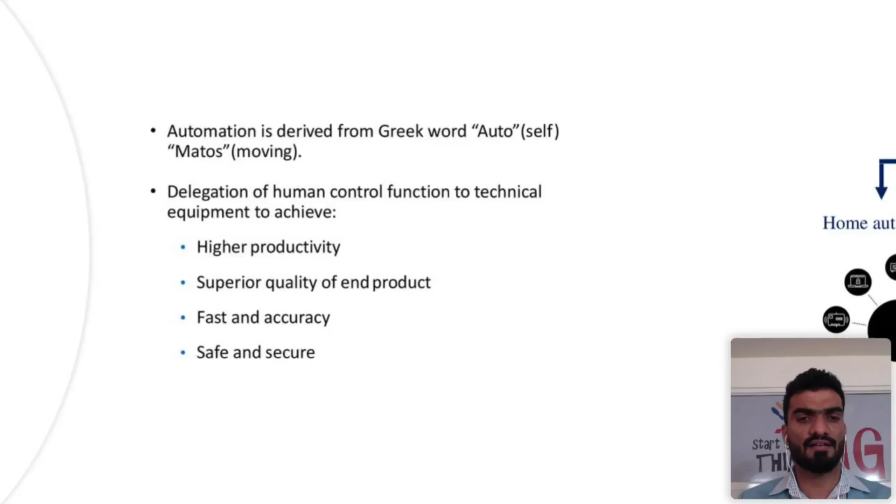I don't want to take much time because I have to follow my timeline. Automation — the basic idea is 'auto' and 'matos': by itself it has to move. That's basic automation, seen everywhere. But today we are going to talk about industrial automation and types of automation.

First, types of automation: there is home automation, building automation, and industrial automation. For home automation, you might know it well — it's like CCTV surveillance, access control such as door access and gate access, and lighting control. So CCTV, networking, lighting control, and access control are the main parameters involved in home automation.

Now coming to building automation — what's involved there? It includes lighting control, CCTV surveillance, and also HVAC: heating, ventilation, and air conditioning systems. So HVAC covers heating, ventilation, and air controlling systems, like air conditioning, and together this maintains the entire building.

Audio clear? Yeah, yes. Just a moment — I want to tell one thing: when I'm going by my flow, just allow me to continue. No problem, we are there, and we'll answer all your technical queries and clarify all your doubts. We'll stop somewhere and have a discussion. Meanwhile my team is also in the webinar room, and they'll answer questions as they come. So I may not stop to answer right now — just allow me to move on.

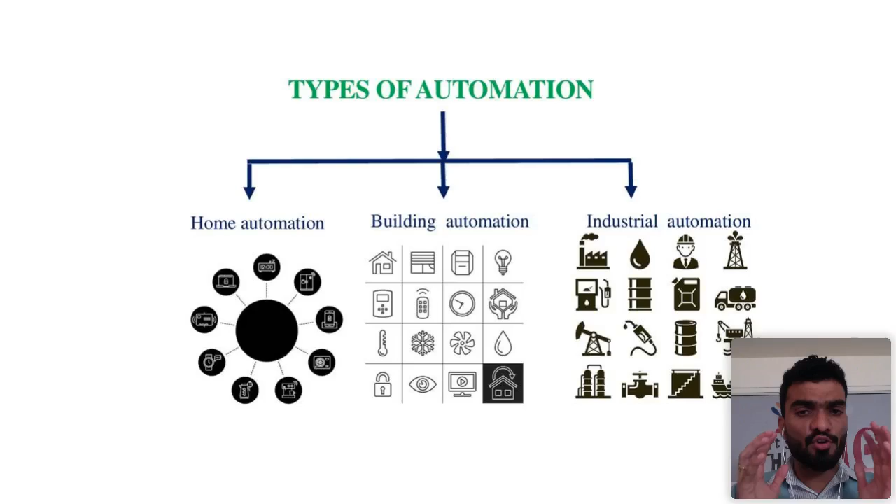See, basically two things: machine automation and process automation. Any one will be there. Now we are going to see, if you go by your industrial automation, if you do your machine automation and process automation, what are the main advantages?

So these are the main advantages. Your production will get increased, and your productivity will get increased. Your product quality, production, ease of control, and safety level, all these things are going to get increased, and your manpower is going to reduce. Your energy consumption will get reduced, your project timeline also will get reduced when you make an automation, and your raw material consumption to make a final product will also get reduced. So these are the main benefits to the industry.

Now, most of you are from academics background. I just want to tell here, the industry is much benefited when they go for industrial automation. When they make their machines automation, when they make their process automation, they are going to get these benefits. So you have to know, by means of these benefits, people are forced to, people are required to convert into automation. All these industries, any kind of manufacturing unit, they have to convert into this automation. So this is a need, and this is where you people also can understand the potential. The potential is huge.

Audio, please. Hope my audio is clear, if I'm not wrong. Stuck up, Rajshekhar Gaud is telling it is stuck up, and Guru Prakash saying it is audio, please. Can anyone clarify me? My AV is clear. AVS, audio, video, and screen. So whether my AVS is clear, please confirm. It is stuck. Is my AVS clear? Hello? Yes, clear. Thank you. Okay, done. Okay, so whoever is facing challenges, please try to reconnect. If really there is a challenge, then I'll also check my connection.

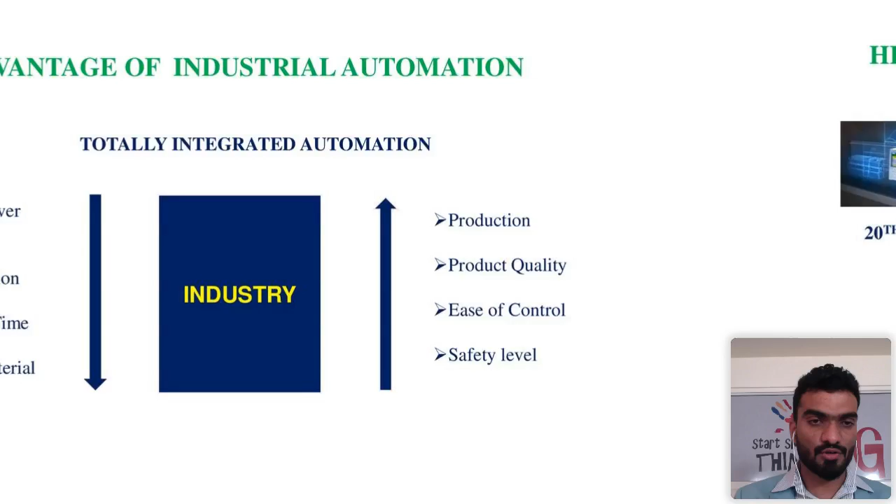Yeah, thank you, so now going to next slide. So what is the history of industrial automation, when did it start? In the 18th century, we know very well, it was completely manual control. There was no automation, no logic control or relay logic controls kind of thing. Then afterwards, in the 19th century, they used to control the things, the process, or the movements by using relay logics or some hardware. By means of hardware, by making some relay logics, they were able to maintain few operations into manual interruptions, meaning manpower. They used to avoid manpower, and they used to do this.

And then in the 20th century, all these activities were taken up by logical controllers. It might be a microcontroller, it might be a programmable logic controller, it is different. So they have introduced these logical controllers, and they are able to make the process into automation.

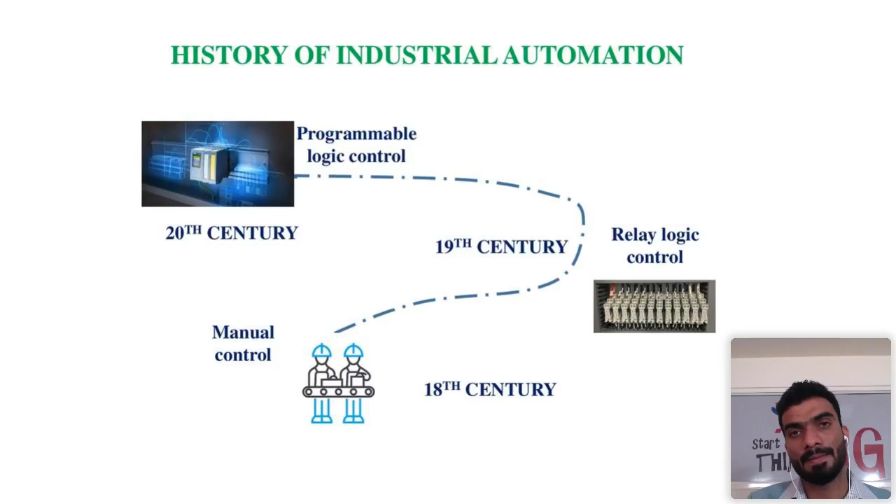Now, what are the automation products? We call it PLC. We are going to discuss all these products in the next slides, don't worry, I'll just move on fast here. PLC, we call it programmable logic controller. HMI, human machine interface, and SCADA, supervisory control and data acquisition. VFD, DCS, Servo - these are the products or topics. People from academics, you can take it as topics. People from industry, we know it very well, it is products. So we wanted to cover both.

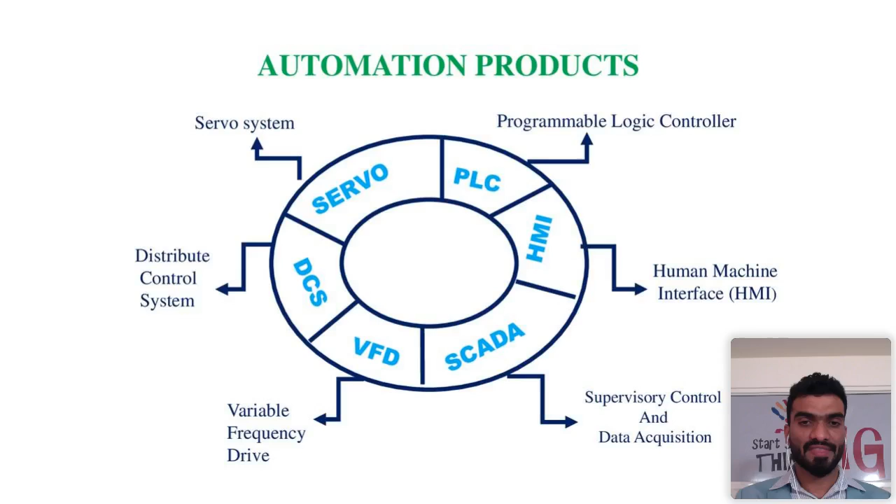Yeah, so now we are going to discuss what is PLC. So PLC is like programmable logic controller, and it is a digital operating electronic system designed for use in industrial environment. See, it's like, we have a practical piece, practical kit over here. I would like to show, but before that, I would like to tell programmable logic controller is like a hardware device which is shown in the image. We call it PLC.

The PLC is going to have inputs and it is going to have output terminals, whereby you can connect all the field instruments as inputs and all the field instruments as outputs. And then we can connect this particular PLC hardware to your laptop, because you need to do the programming to that PLC.

The PLC, based on the programming, uses programmable logic controller software. With the help of software, we develop a program, the logic, the sequence, how you want to run your machine by getting input and giving output. So this entire logic we build in a programming software and send it to the PLC.

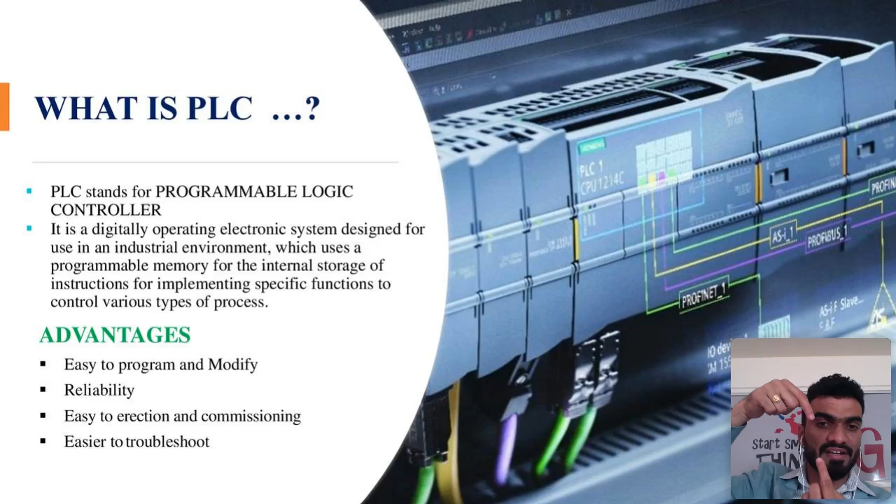Based on the input command received, whatever program we have written might say that whenever the command is received, the motor should turn on. Then my PLC performs that particular program and gives output, so my output will start and rotate the motor. So this is input, this is output.

Between we have the PLC. Now I'll show you one practical kit. See, this is a PLC, programmable logic controller. So whatever we have connected here, these are inputs, and the outputs we have connected at the bottom, we call outputs. So this is input and this is output.

If you see this PLC, it has all the status indications: power, when we give power it gives a power indication, run, error, communication 1, communication 2, communication 3. This is a communication port whereby we can connect a cable to your laptop, write the program on the laptop, and send it to this PLC, which receives the program based on the input.

Suppose, for example, we have shown some outputs and some input connections here. Are you able to see? This is a sensor. When I sense it somewhere, my PLC is going to give an output saying that particular command has to be on. So if I remove this, then it is off.

We have written a small program to show you this live. See, if I touch this here, then you will see. So I'm just touching the metal part, and this sensor is sensing, and my PLC is giving output. Are you able to see this?

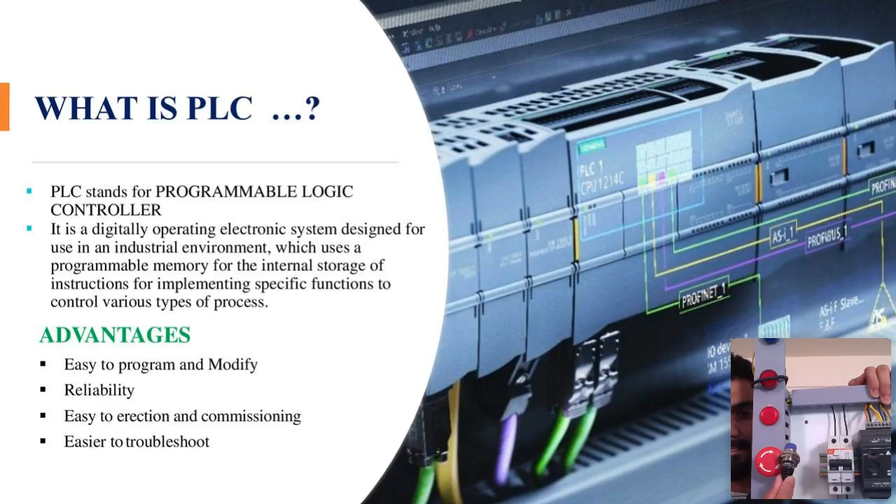Which PLC is this? For the demo purpose, we have shown Delta and Siemens PLCs here, just for the idea's sake. What my intention is, you need to connect your inputs and your outputs to the PLC. Based on the logic required by the user, we develop the program, and that program can be performed by the PLC without any manual intervention. So this is all basics about PLC.

There are programmable logic controller software, like ladder logic. We'll discuss which PLC application software to use in the next slide. We have ladder logic, a basic language used to develop the program. We suggest ladder logic. Now, what are the main advantages of PLC?

It is easy to program and modify. It is a more reliable product. Erection and commissioning become easier, and it is easy to troubleshoot because it's an intelligent device. When something goes wrong, it will show an error indication, and it will also give an error message to the HMI or SCADA. Then we understand what the problem is in the PLC, and you can rewrite the program multiple times.

It is not like a microcontroller, where we have limitations. If you write the program, you may not be able to rewrite it. But in the case of this PLC, you can write the program, modify it, change the inputs, change the outputs, numbering, coding, everything. So you can do this multiple times.

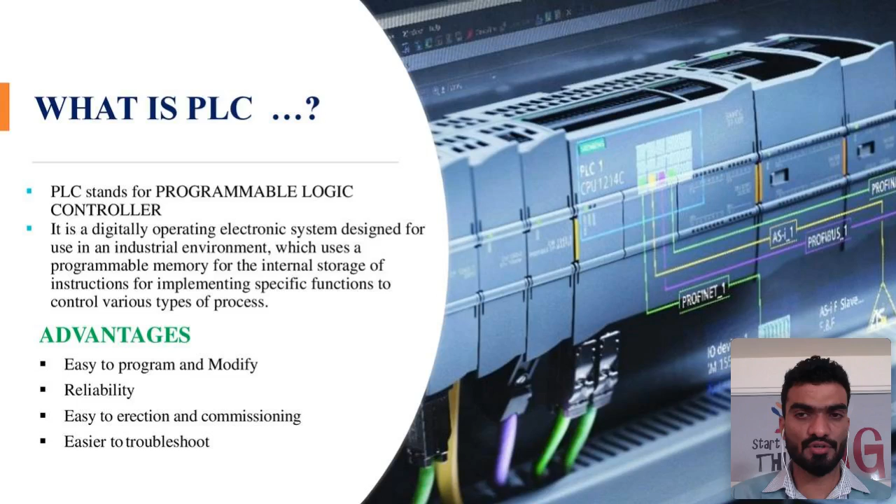Now, what are the applications of PLC? I can tell you PLC is used everywhere automation is required, because this is a logic controller whereby all your field instruments, like sensors, push buttons, all switching devices, all inputs and outputs, need to be connected to the PLC itself. There should be a master controller which can receive inputs and send outputs.

With the help of this master controller only, we'll be able to make any machine or any high-end automation. So PLC is applicable everywhere, I can say.

And the major applications, if you want, you can use cement plant, most of the applications like in your crusher, stacker, reclaimer, bagging, and your kiln section, and your silos, everywhere. Food and beverage, all the sections start from cleaning, then capping, filling, then packing, then dispatch, storage, everywhere, conveyors, all these areas.

Now, what is HMI? HMI is like human machine interface. So it is like a hardware. I'll just show you the hardware first. Yeah, this is the HMI.

So this particular device, we call it as HMI. HMI basic definition is human machine interface. So it is like an interface device between machine and man. You have operator, you have machine most of the times in an industry. So your HMI works as a media between your operator and machine, in between.

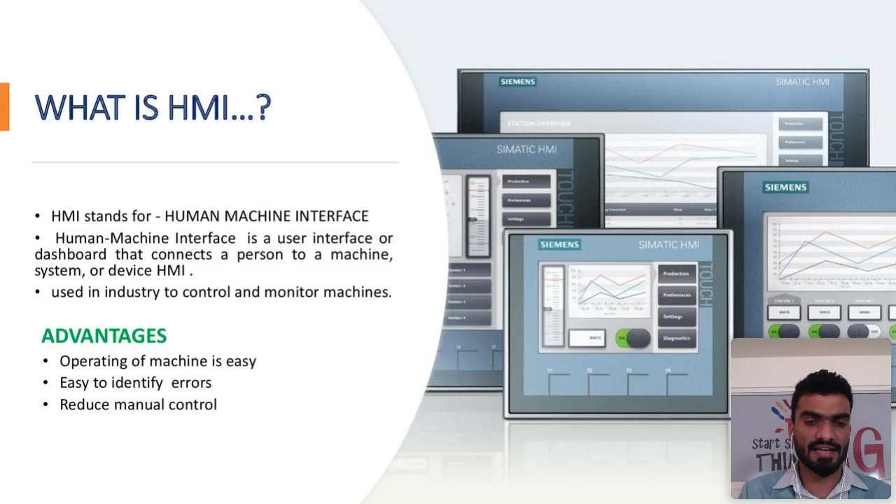Applications of HMI include packing machines. Most of the time HMIs are used in packing machines because it is very good for recipe management. In a packaging machine, you need to enter multiple parameters, so in that case the HMI plays a major role.

It can store all those parameters, and whenever you recall it, it will select them. Suppose you need a 100 gram pouch manufactured, then in the same line you may need 200 grams, 500 grams, or 1000 grams. Every time you set all these parameters manually, it takes more time. With HMI, once you make a recipe, you can just call that recipe and start the work and move on.

We'll come to the difference between HMI and SCADA, Mr. Jitendra, because in the next slide we are going to discuss SCADA and then we'll compare both.

One thing you have to understand about HMI is that it is used for one PLC — one machine is controlled by one HMI. Just remember this point; I'll tell you the differences between HMI and SCADA in the next slide. We can also use HMI in process industries, but most of the time one HMI is used for one machine, meaning one PLC. So HMI is like a machine-purpose device.

These are some bottling lines and packaging machines. All of these are examples of HMI applications.

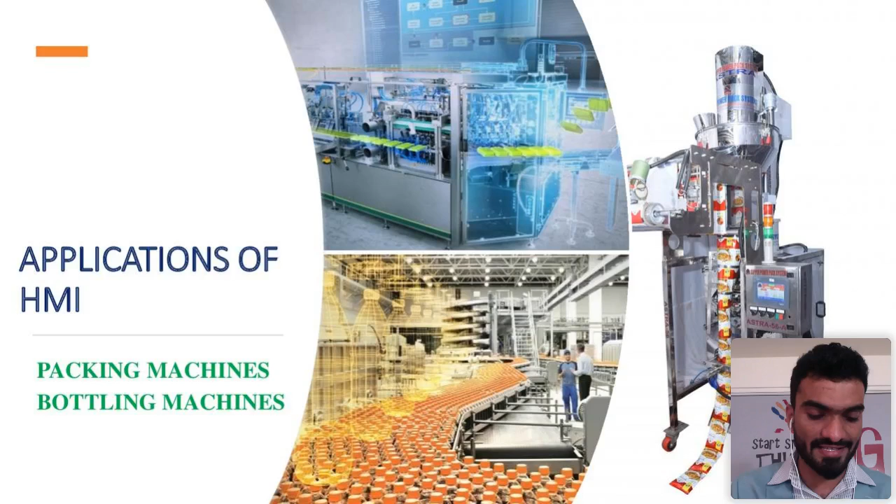Now we'll see what SCADA is. By seeing this picture, you can understand that SCADA is like a software first of all — HMI is a hardware, SCADA is a software. This is one particular difference. SCADA stands for Supervisory Control and Data Acquisition; the abbreviation itself describes it.

The controlling becomes a supervisory function, and it can acquire data. It can acquire entire plant data, store it, and give you a recall whenever you want the data. From the stored data, you can recall and check later. So if you want, say, a 30-day-back production report of what's going on in my plant, you can recall that data, get the graph, take a printout, and check how many times the power was on, what the production level was, and when a particular motor or machine got turned on. All these matters can be checked from previous data.

So SCADA is like a software — you get a software that you load into your PC or laptop, and you have to make a program. Of course in HMI it's the same; we get HMI software where icons of motors, compressors, and other industry items are already configured. You drag that option and place it, then make the addressing — we call it a tag. You give the tag address, and then the addressing between your PLC inputs and outputs.

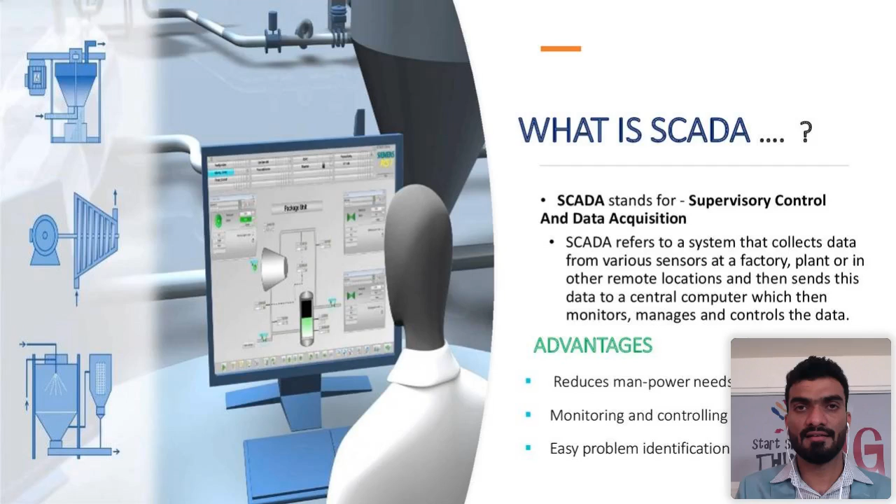You can create securities, meaning you can create more number of operators. You can give some screen access to operators, some more level of access to supervisors, and high level access to managers. You can create these logins and passwords - we call this user creation.

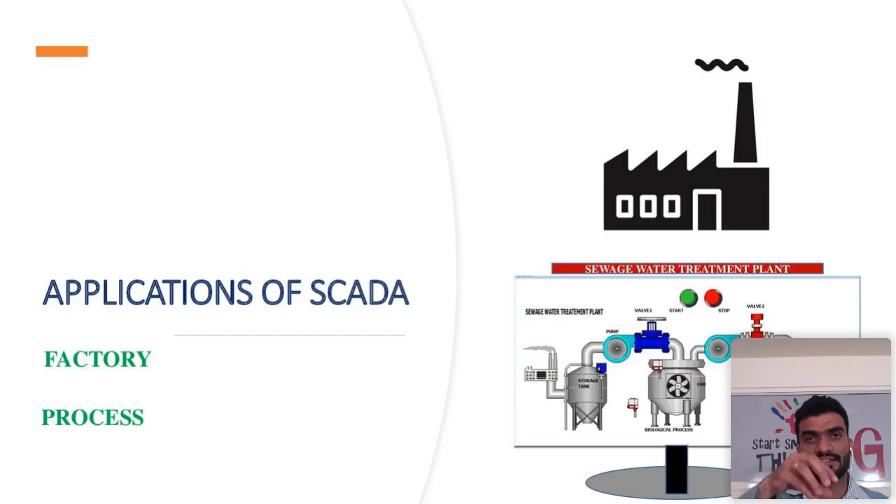What are the applications of SCADA? SCADA is most of the time used in process industries. When I say process industries, it is one interlocked with another. For example, power plant is a process industry, beverage is a process industry, pharma is a process industry, water and wastewater is a process industry. All these industries are interlocked with one another.

So this entire process is monitored through SCADA - it's like factory and process, and also pharma industry. So these are the applications of SCADA. SCADA will get all the field inputs and outputs from the PLC only. Kindly note this point.

Now, drives - what are drives? Drives we call VFD, variable frequency drive. It means to control our motor. Generally we have motors, right? We have induction motors, we have AC motors, and we have DC motors.

SCADA is for vast applications, right? So now we are talking about drives. Drives are of two types: for AC current we have AC drives, for DC current we have DC drives. AC drives are used to control our induction motors. So what is the benefit of drives? I'll show you the drive first and then I'll explain.

So this is a VFD. We connect L1, L2, L3 - this is line 1, 2, 3. These 3 terminals are for the input. We will connect the 3-phase input over here, and my drive will get power, and then I'll connect the output terminals of the motor here - U, V, W, the output 3 terminals - I'll connect to the motor.

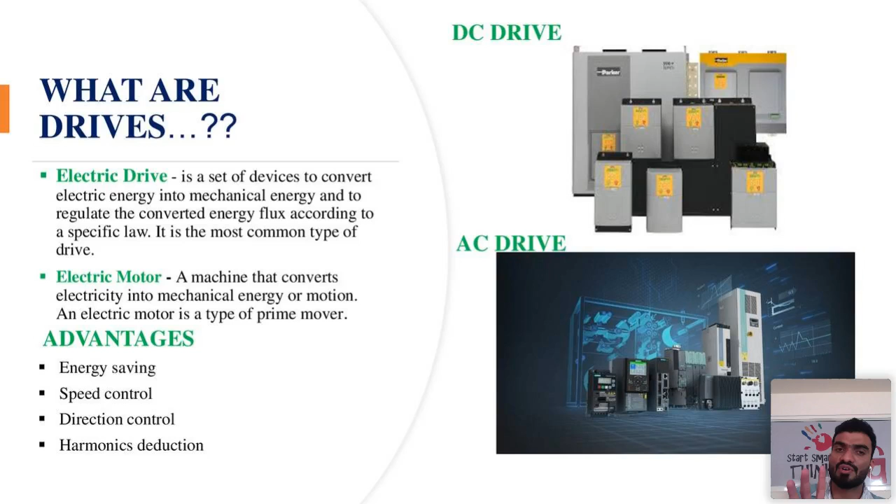These are the points. So what are the applications of VFD? For AC motors, we have AC drives. DC motors also have DC drives. What are the applications? We have shown some basic applications because you need to understand.

Elevators, all your elevators will be running through drives. That's the reason you are getting proper speed levels and smooth start, smooth stop, increase, decrease, all these kinds of control. All these elevator drives and elevator motors are connected to the drive. That's the reason your controlling has become more easy nowadays.

Then conveyors, most conveyors wherever speed controlling is required, increase, decrease kind of thing, these are the places we suggest to use drives. People are using drives in conveyors in most areas in industries.

Now coming to the third image, we have shown a building here. In this building, whatever red color icons we have shown there, those are motors. They are used to control the air, the room temperature into that building. They have used air, and for pumping water and other wastewater treatment, they have used motors. So it is basically air and water control.

Whatever white color icons we have shown there, all those are drives. So for each motor, we have connected a drive to control the speed, to maintain the temperature, and to start and stop whenever required. So these are a few applications for your idea.

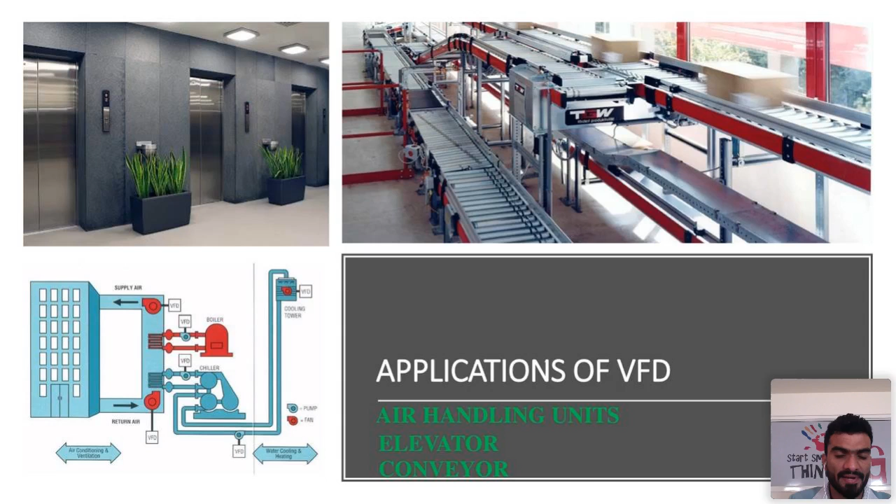So what is a servo system? A servo system is like a combination of motor and drive. Now I'll show you, we have some servo here. This is a servo motor. Sorry, this is a servo drive.

As I have shown in that picture also, it is a motor and drive combination. This is a servo motor we have. This is a motor and drive, and we have two cables. These two cables are connected to the drive of the servo. So we connect power. First we give power.

We give power here, these particular terminals give power as an input. Then my VFD will get power, and these are the outputs which we give to the motor. Then my servo motor will get power, and one is a power cable, one is an encoder cable which is connected to the motor, and one more is a communication cable which is connected to your laptop to make the program. So this is the combination of motor and drive.

So a servo motor is like a permanent magnet motor. We call it a synchronous motor. This is an AC motor, synchronous motor. We also call it a permanent magnet motor.

So here the advantage between an induction motor and this servo motor is that this particular shaft is a single shaft which is connected between the permanent magnets. So whenever it rotates in some particular direction, this rotation is more accurate, and we have an encoder cable here. Due to this encoder cable, this encoder is directly connected to the shaft.

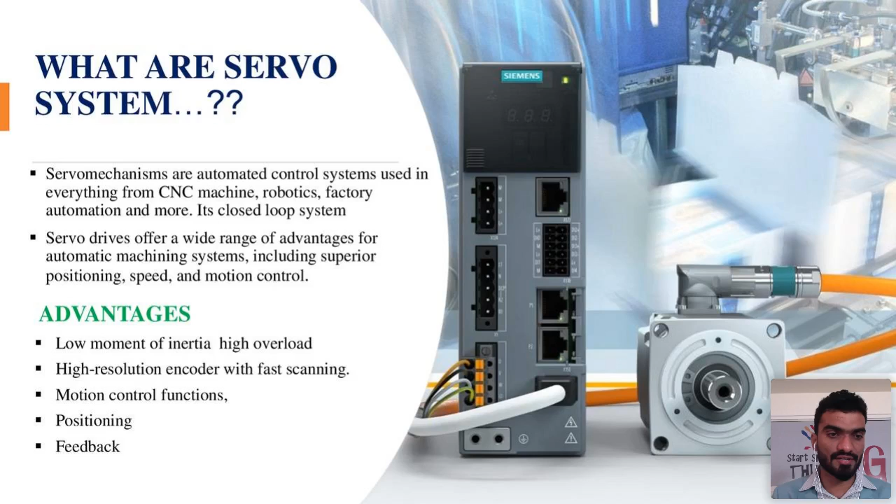As shown here, low moment of inertia at high overloads, and high resolution encoder. It has two types of encoders: incremental encoder and absolute encoder. Absolute encoder means it will give high accuracy, and whenever the power goes off and comes back, it will start from the same position. It retains its memory and starts from the same point, and it can have PLC analog control very easily if we have these absolute encoders. Then motion control functions: positioning and feedback.

Now I'll tell you the applications, then you will understand more. The main applications of servo systems are very precise cutting lines and processing systems, also CNC machines. All your milling, all your lathe works, everything is done by servo, because servo is more accurate. With high speed it can give very good output, and the controlling of everything is very precise. So servo is used in CNC machines, and in high-end cutting machines to have very good accuracy.

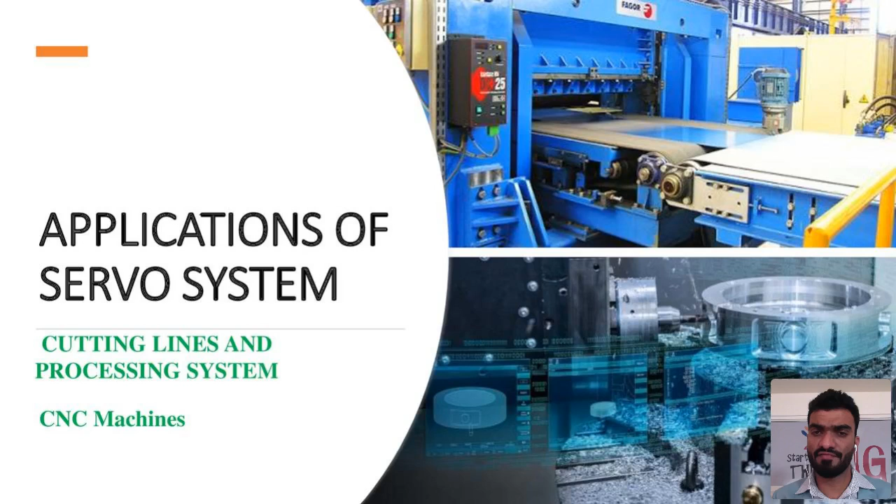So now what is DCS? DCS is a distributed control system. It is like a high-end system, higher than PLC. PLC can only control a few inputs and a few outputs. It has some limitations, but DCS does not have any limitation. It can control thousands of IOs, and it can cover an entire plant—any big process plant, any big power plant—everything, all inputs and outputs and all systems and subsystems can be controlled by DCS. It's a distributed control system.

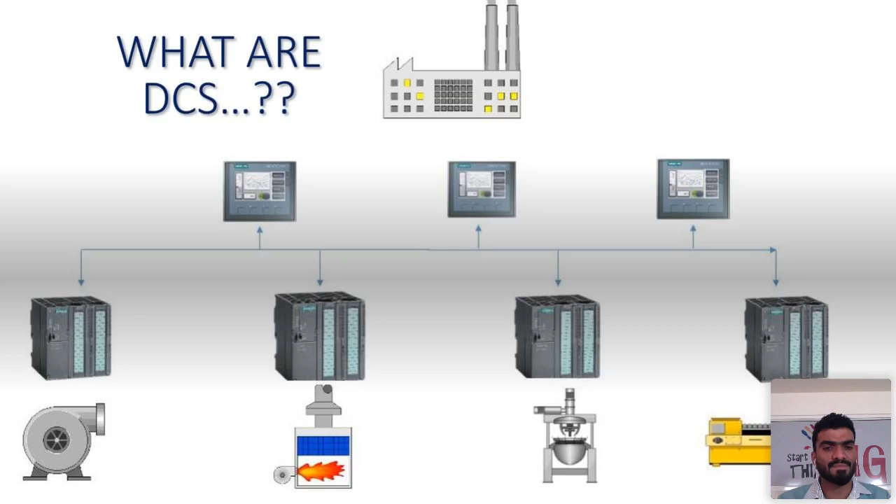So what are the applications of DCS? In pharma plants, for high-end applications, they use DCS, and most of the time power plants use DCS, to monitor their entire power consumption, power output, power inflow, and all these subsystems.

Now, robotics. What is robotics? I think most of you know something about robotics, but we would like to explain it in an industry way. The basic definition of robotics, I can say, is machine controlling machine. So one operation is controlled by another motor, one motor is controlled by another controller, like that—machine monitoring machine, controlling machine, that is robotics.

So where are robotics used? Why robotics? We have certain limitations with manpower. At high-end temperatures we can't work, at very low temperatures, sub-zero degrees, we can't work like a machine can. There are also limitations due to weather conditions, dust environments, and hazardous zones. In all these areas we prefer robotics, and wherever more accuracy is required, wherever more consistency is required, wherever continuous operation 24 hours, 365 days is required—these are the areas we use robots, because robots will work in all these conditions and environments where manpower is unable to work or give the same consistency and efficiency. This is the reason we suggest, recommend, and need robotics.

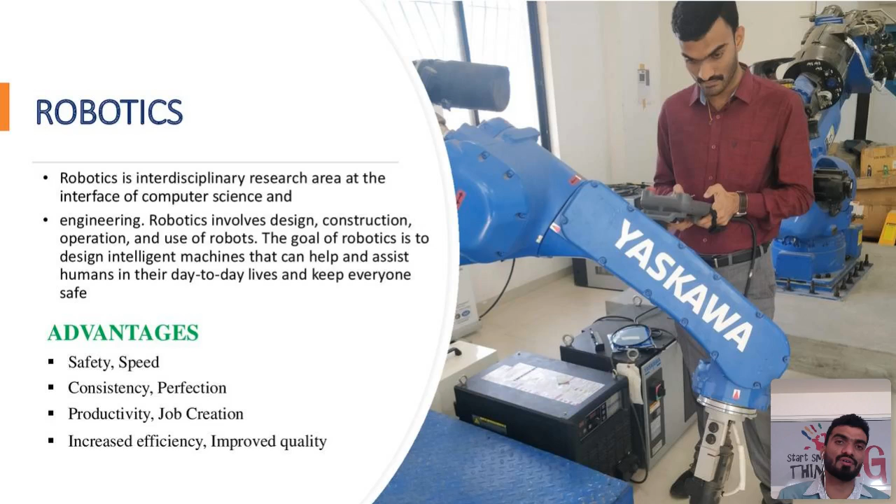The advantage of robotics is that safety will be more, and it will be done very fast. Consistency will be there, perfection will be there, productivity will get increased. You can create multiple jobs for your product manufacturing, and it will be done automatically. It will increase efficiency and improve quality. These are the main advantages of robotics in industries.

What are the applications of robotics? If you see any bottling plant, any beverage plant, robotics are nowadays must and should, because of the high-end speed operations. The bottles need to be picked and placed at certain packing areas, so we need robots to do the continuous operation in a proper manner. And in automobiles, yes, nowadays we are looking for more efficient output and high-end quality output. Robots are used in automobiles to do welding, assembling, painting at paint shops, and other areas. So robots are playing a major role in the automobile industry nowadays.

Apart from all these products, nowadays the entire world is giving more importance to human lives - an operator, a machine builder, a maintenance person, a production person, everyone. So all these human lives are important nowadays. People are giving more preference to human lives, and machine safety is a major topic in this industry, in this automation, in any manufacturing industry.

So there are some machine safety standards while they manufacture any machine, while they are working on the machine, while they are doing any maintenance on the machine - they have to follow certain standards. We, being electrical, electronics, instrumentation, mechatronics engineers, also need to know certain standards while working in industries. That is the reason we have taken this particular slide, because nowadays the future is completely about safety.

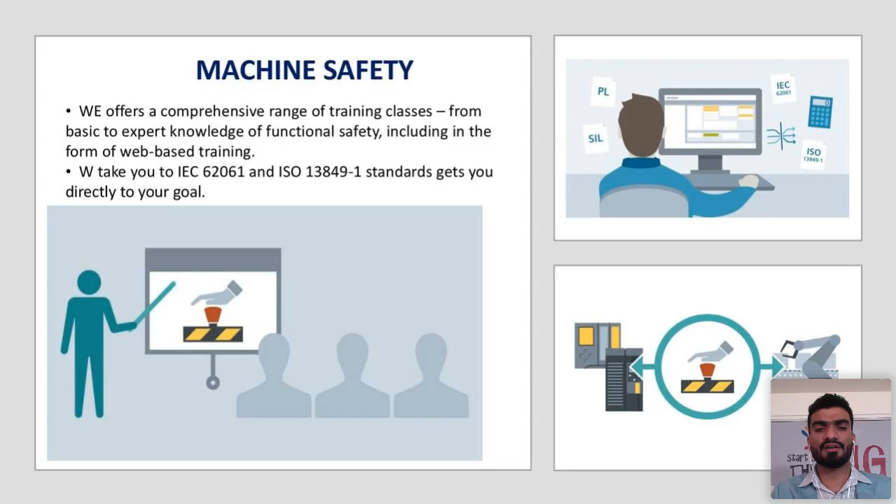While failing, this particular safety product will fail in a safe condition. Say if something goes wrong, this limit switch gives a command to stop the motor. If it is a safety product, it will go from NO to NC and it will stop, it will fail - it will not allow for next operations. So safety products will give this behavior. Emergency stop also works the same way - it will have a positive break contact. During failure also, it will do its work and it will move.

Now we talk about instrumentation. This is the most important topic I can tell in automation, because all your field devices - we also call it field device, we call it instrumentation.

Say suppose we have sensors. We have inputs and outputs, right? So all these inputs and outputs we call field devices, or instruments. We have classified them into four: digital input, digital output, analog input and analog output. We have digital and analog, both in inputs and outputs. So now what are digital and what are analog?

Digital is like on and off, whether it is 0 or 1, we call it digital. It is only one state, a switching device, we call it digital input. Whether it's your push button, your toggle switch, or any kind of switching device, we call it digital input. Only one condition, on or off. Then digital outputs, same on or off, which is indicative. All your indication lamps, your motor output, everything, all these outputs which take the command and give the signal, is like an output. We call it digital outputs.

Then we have analog inputs, which are continual, not 0 or 1, which is continuous. It continually varies, we call it analog. Analog input examples are like potentiometer - you can rotate the potentiometer and increase the motor speed. Temperature sensor gives continuous temperature. Level sensor gives continuous tank level. Analog outputs, examples of analog output, is also a continuous signal which shows the indication. Say current variation, speed variation, showing how much speed the motor is rotating, that particular output through the drive, we can take this - so this is an analog output. For analog output, we have automated valves - continue valve open, the valve will open continuously. This is an analog output example.

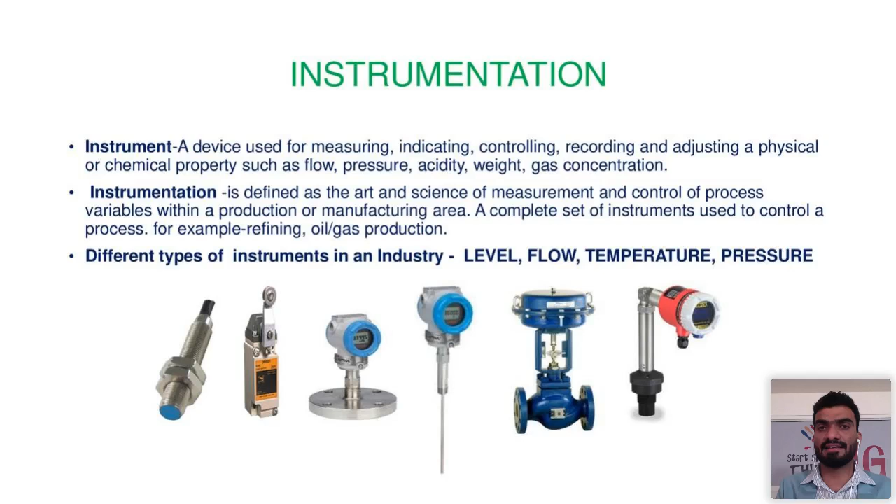We have shown some digital and analog devices for your idea. So this is all about instruments. Instruments play a major role in automation, because to sense each signal, to give each command, we need instruments.

We have both inductive and capacitive sensors. Inductive sensors detect the metal parts, and capacitive sensors detect the non-metal parts.

Now it is Industry 4.0. This is a future topic. We just want to give a light introduction, we are not going to discuss much. It's a big topic actually. I'll just quickly give some idea about this.

So we are now at the 4th generation. We have crossed the first generation, which is completely manual. Second generation is mass production. Third generation is like automation - we are now working on third generation, and we are now just shifting from third generation to 4th generation. In this third generation, we are using automation components like PLC, HMI, SCADA, drive, servo, and robotics. Unfortunately, some people are still not completely using automation systems into their production lines, into their machines. But the thing is, we are now in need to move from 3.0 to 4.0, because the world, the people, the needs, everything is now increasing.

The demands and needs are also increasing. To fulfill those things, we have to upgrade ourselves time to time in terms of technology innovations and also safety and security. So these are the four objectives. To meet these four objectives, we have to change to the next range of technologies to fulfill needs of the future and people. So this is what 4.0 talks about.

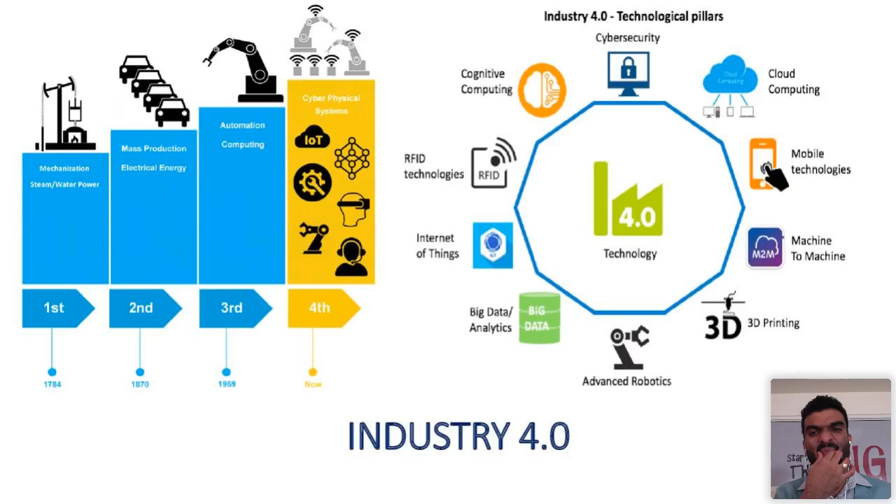Yeah, it is also there. Now, IIoT, I will talk very little about IoT.

IoT is like Internet of Things, taking all the local controlling to network, that is IoT. It's like taking remote into wireless, all your switching, all your lighting control, all your access controls, all taking into a wireless Wi-Fi, that is IoT.

But what is industrial Internet of Things? Industrial IIoT is also similar. For example, you have a machine whereby you have multiple inputs and outputs, and you have multiple machines like that.

So all these machines can be connected to a network gateway device. We are going to install one network gateway device, whereby all your different types of machines, through hardware, are going to connect to this network gateway. When this is connected, this particular network gateway can be connected to your remote area, and it will give all these signals of these particular machines, and it can monitor and control through the remote.

So this is all about Internet of Things, industrial Internet of Things, taking all these local machine controls, devices, field instruments into the network gateway by means of hardware connection. And this network gateway will talk to remote. It will monitor it, and it is going to help you for monitoring, controlling, taking data, everything. So this network gateway plays a major role.

So this network gateway has different types of communication supporting systems, hardware, input output kind of things, and then RS485, serial, and so on. All these communications it is going to support, and it can be connected to the internet with an IP, and then it can talk to a remote.

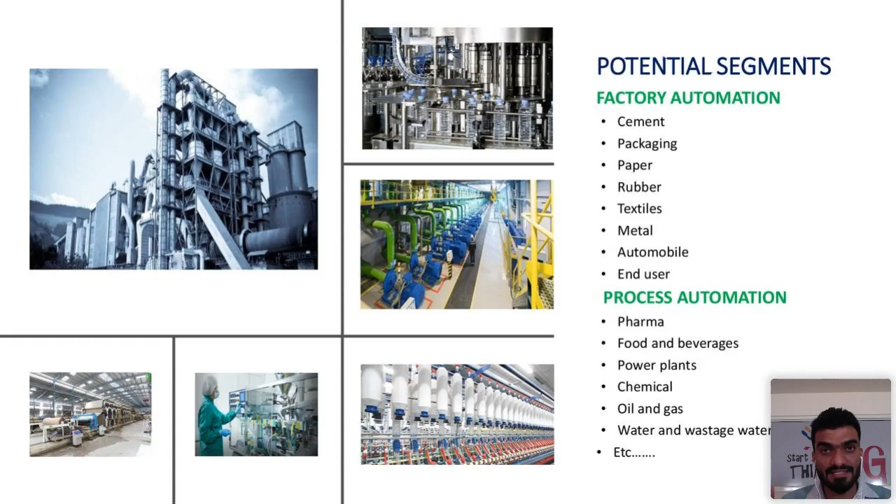Having knowledge, getting knowledge, or enhancing knowledge on all these topics, products, and applications is very beneficial and useful to enter into this vast industrial domain. Okay, are you clear with all the slides?

Once you get good knowledge on these particular products, topics, programming, and other things, you are going to get opportunities in these industries. We have different types of opportunities: automation engineer, programmer, designer, service engineers, technical engineers, sales and service engineer, automation maintenance engineers, sales coordinators, service coordinator, project engineer, technical support engineer, technical assistant engineer, application engineers.

When it comes to innovations, if you have any innovations in mind from industry or academics, once you have this technical knowledge, you can become an entrepreneur with your innovative ideas. You can make solutions to the challenges faced by people, turn your ideology into reality, come out with a new product to solve people's problems, and also create employment. These are the opportunities under innovations.

And under R&D, we have control engineers, system engineers, and product developers. You can pursue R&D as well once you have this knowledge.

Now I would like to stop here and answer all your technical queries. With this slide, I have finished my technical presentation, and I want to pause here to answer your technical clarifications. I hope we've taken a little more time due to network challenges, but don't worry, we have covered all the slides we wanted to cover.

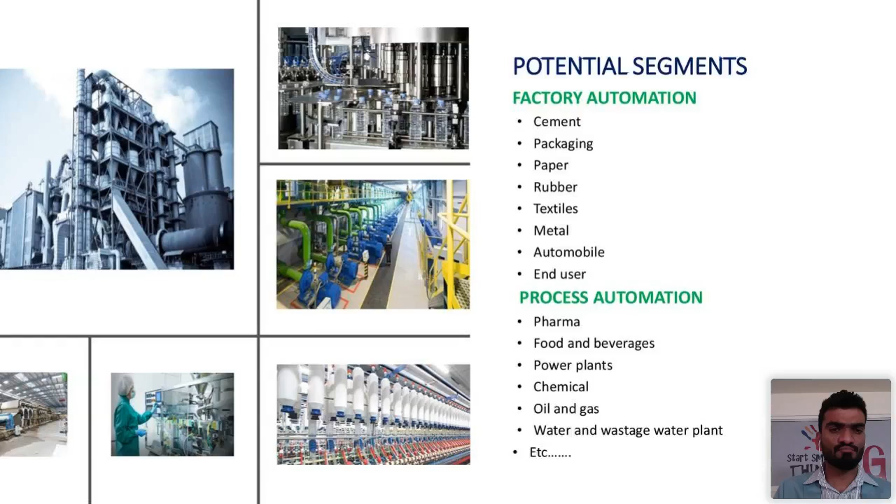In the next slides, if you're interested, we can discuss some advanced steps to move forward. But I would like to stop here first and answer your queries if there are any.

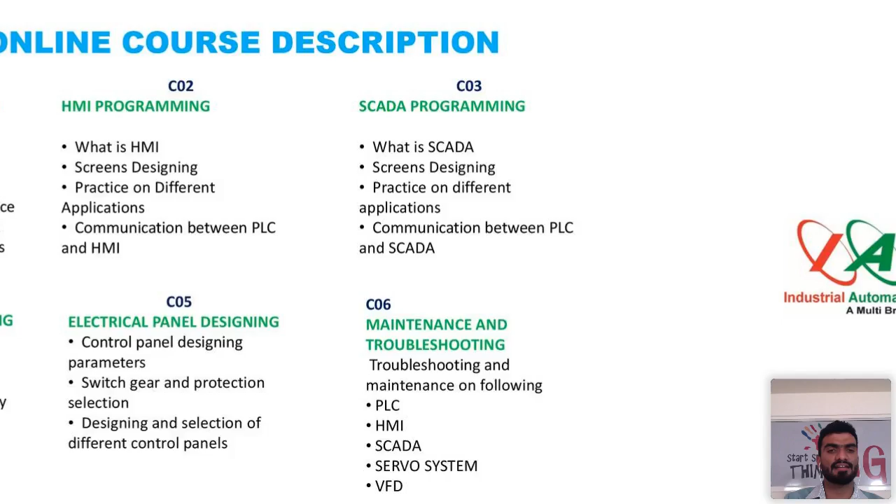I'm just moving into the next slide, I'll tell you in brief. Day 1 will be basics. We'll take 2 hours a day through Zoom, and we'll give you a recording session. Don't worry if you're unable to join on time - you can have the recorded session, valid for more days, and you can check it multiple times and learn from that.

So day 1 is basics. Day 2 we take you into programming - how to do PLC programming, what is PLC, what are the programming softwares. All those things we'll take up, and we'll teach you step by step how to do PLC programming.

And we'll teach you programming practice on software - we'll give you free software and teach you how to practice. You can do practice later at home on different applications. We'll teach you some of the applications and give them to you, so you can also practice on those.

And day 5 is how to do wiring, how to connect field instruments to the PLC - we're going to teach that too. I think this is very good stuff our training department has designed. In the last few webinars, we got very good response on these courses because the content here is very good, and we are covering very important topics.

So it's just a 4 to 5 day session of training, which is online. You can join from any place, flexible timings because it's a recorded session. You can have the recording with you and listen to it anytime you're free.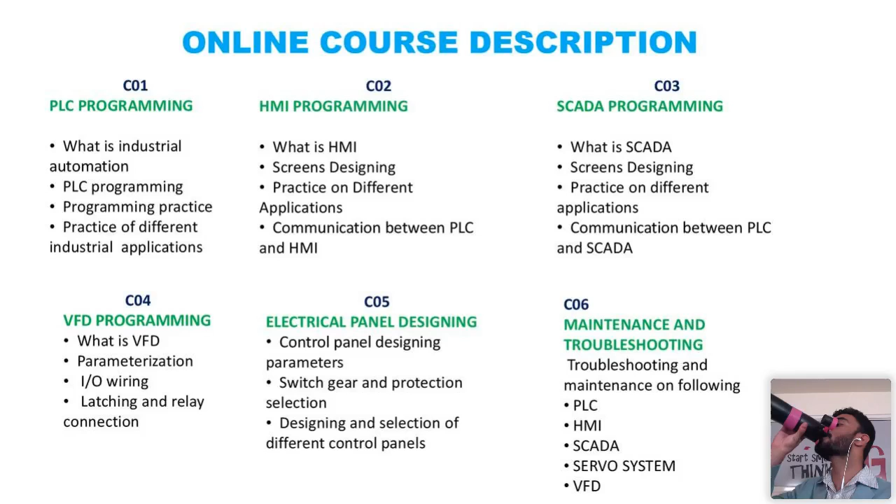The reason we are unable to offer it free of cost is we want only serious candidates to be there. So we are just charging a basic amount, because then the seriousness levels will be high and we can interact more positively.

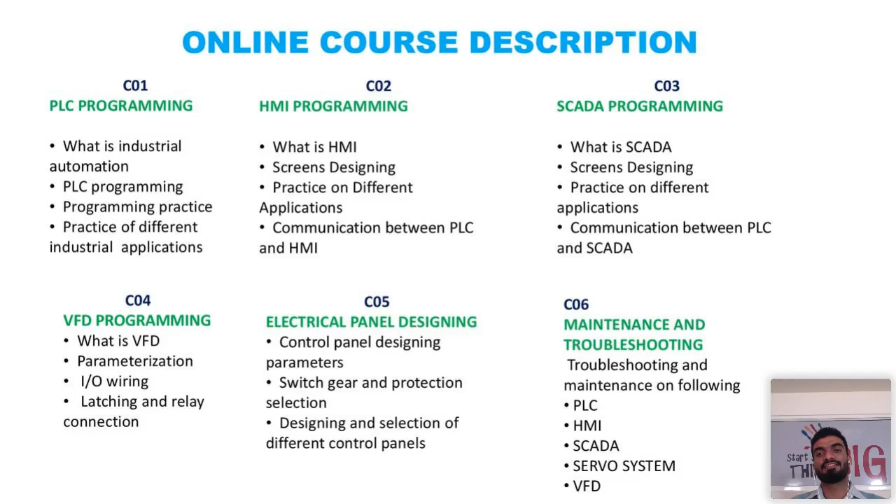Yes, Mr. Shenmugam, this is a very good offer. Those who are interested in automation, this is our objective - please look into these courses. Those who just joined for the knowledge sake, we are also happy with them. Please give us feedback to improve more, so we can reach out to more people like you.